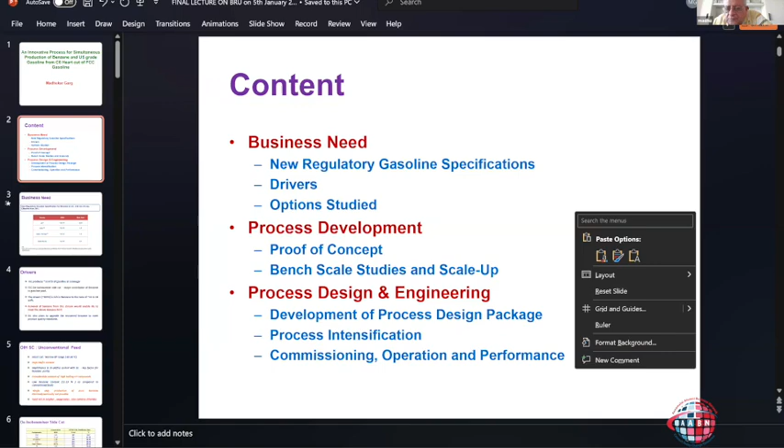Okay, so process design and engineering, and then finally commissioning and operation, and we also ended up doing what is called a GTR, guarantee test run.

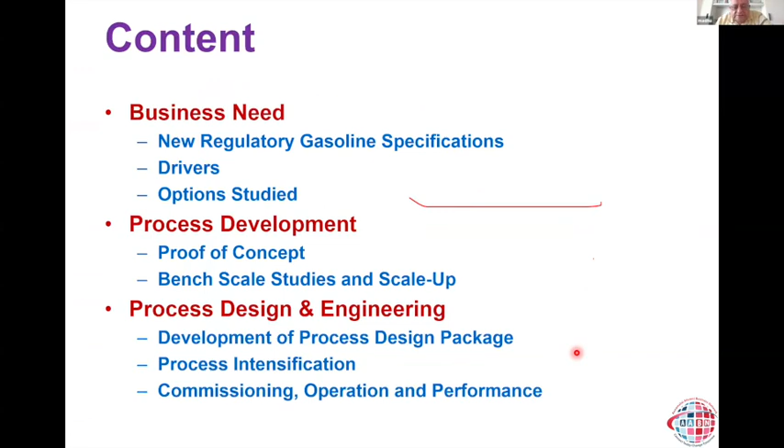Guarantee test run. Well, let's talk about the business need.

So roughly around 1% is the specification of benzene in FCC gasoline, because of its carcinogenicity. The US took the initiative under the MSAT 2 regulations to reduce it down to 0.62%.

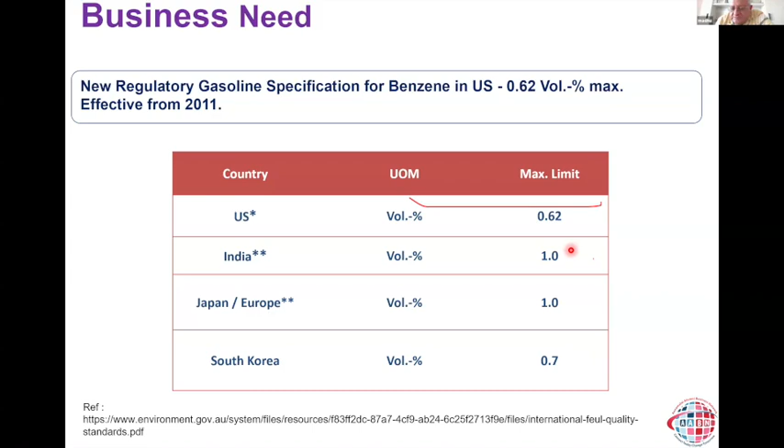At that time, Reliance had two of the world's largest FCC units, each about 200,000 barrels per day, so a very large quantity of FCC gasoline goes into the gasoline pool.

When Reliance looked at the various streams going into the gasoline pool, the gas plant of the FCC in Reliance is pretty exhaustive, and the de-isohexanizer column side cut was identified as the major contributor of benzene in the gasoline pool, roughly about 11 to 19%.

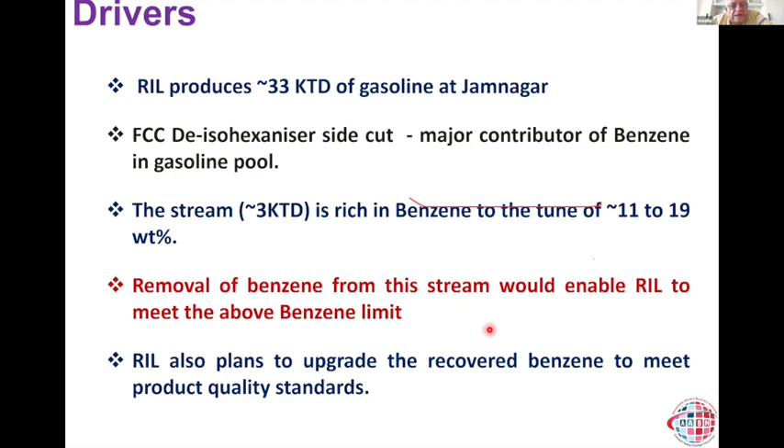So it was thought that if we could remove benzene from this stream, it would enable Reliance to meet not only the 1% domestic specification, but also 0.62% for export to the US. Reliance also thought that if we could recover this benzene and sell it, that would be a bonus—meeting the gasoline specification while also selling valuable benzene as a petrochemical feedstock.

Now, from the perspective of someone working in liquid extraction or extractive distillation, if you look at the de-isohexanizer side cut, first of all it's a hard cut—a very narrow boiling range, 60 to 90 degrees Celsius, with very high olefinic content, and I'll share the composition.

The naphthenes and diolefins co-boil along with benzene, making it very difficult to separate benzene by pure distillation, so they form an azeotrope. In fact, those knowledgeable about this area would know benzene forms azeotropes with almost every hydrocarbon—naphthenes and diolefins included, and for example, benzene and cyclohexane boil very close together.

A considerable amount of high boiling C7 components were present, compared to conventional feedstocks for making aromatics, like reformate or pyrolysis gasoline, which are roughly 60 to 80% aromatics or benzene. This is a very lean feed, around 11 to 19% benzene, so recovering pure aromatics from here is itself a challenge.

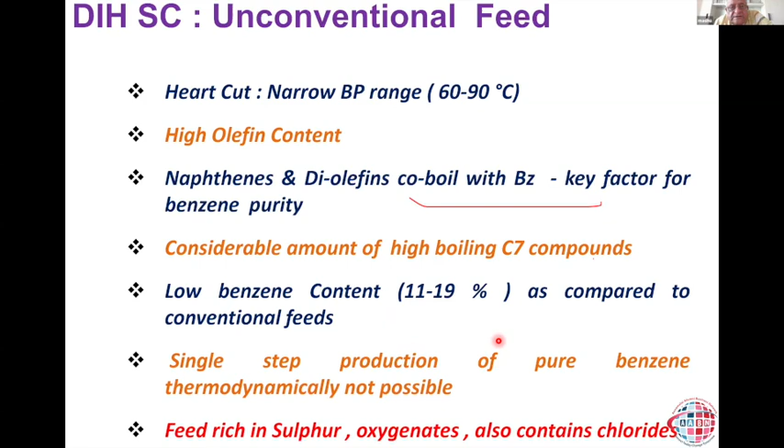This is typically the composition of this de-isohexanizer side cut. As you can see, the range of composition doesn't vary a lot—it's mostly C6 and a little C7, but very low in benzene, only about 15%. This is one of the samples we received at IIP; we received several batches of this material, but this is typical.

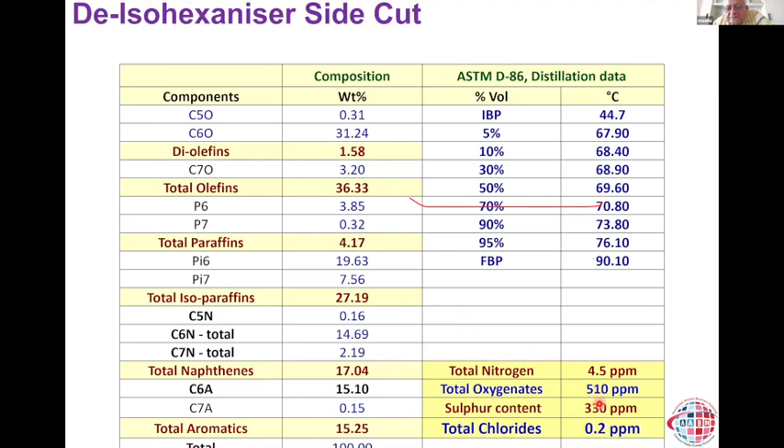The numbers won't vary too much from here. Largely what you see is that it has roughly about 36% olefins, which contribute to the octane in the gasoline. Paraffins is about 4%, isoparaffins 27% - this is also an octane contributor. Naphthenes around 17%, and there is C7 around 2%. More importantly, we have diolefins, roughly about 1.58%, and I'll come back to this in a moment. These are some of the impurities like oxygenates, sulfur, chlorides, as well as nitrogen.

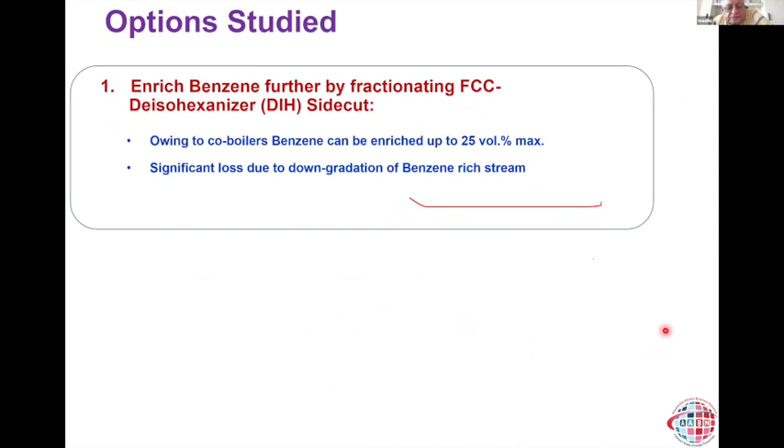So the options that were studied to begin with - this was done by Reliance. This was the time when I was at IIP, around 2011, 2012, about 12 years earlier from today. This work at IIP - Murthy ji sent me a mail sometime around end of 2010, early 2011, asking us whether we could look at this feed to achieve this objective. So this was some of the work earlier done by Reliance to see if we can enrich, or recover benzene just by simple distillation. But that wasn't possible, so that was given up.

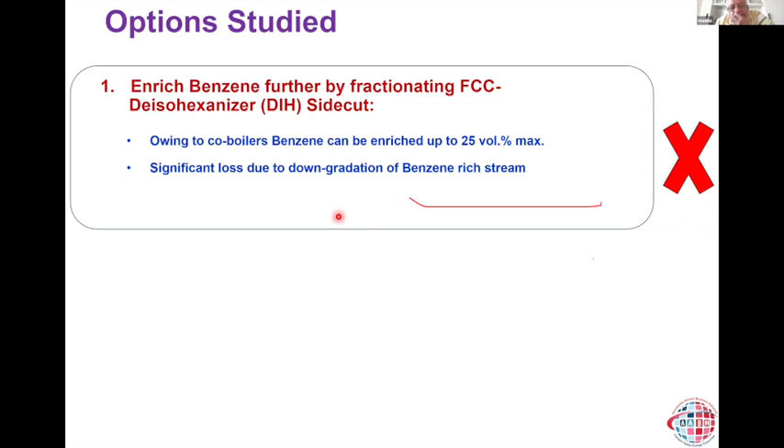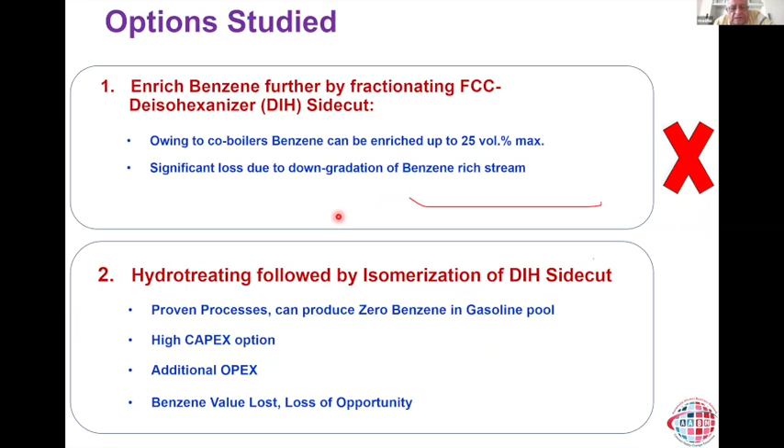And then, of course, the standard practice which the world follows is to hydrotreat this feedstock, followed by isomerization. But actually you lose the benzene. Not only that, but you have high capex and opex. So this was not something chosen by Reliance.

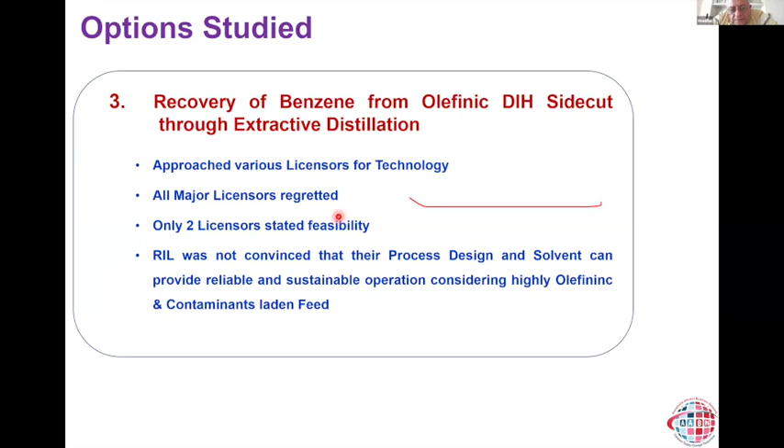So what was actually decided was that - this was when I was at IIP - Reliance approached various licensors for this technology. A lot of them regretted. Only 2 licensors stated feasibility, and one of them even competed during the project. But there was no proven technology - meaning no operating plant existed to recover benzene from this particular feedstock. So Reliance was convinced that we need to develop this technology, because no commercial solution existed to handle this feedstock.

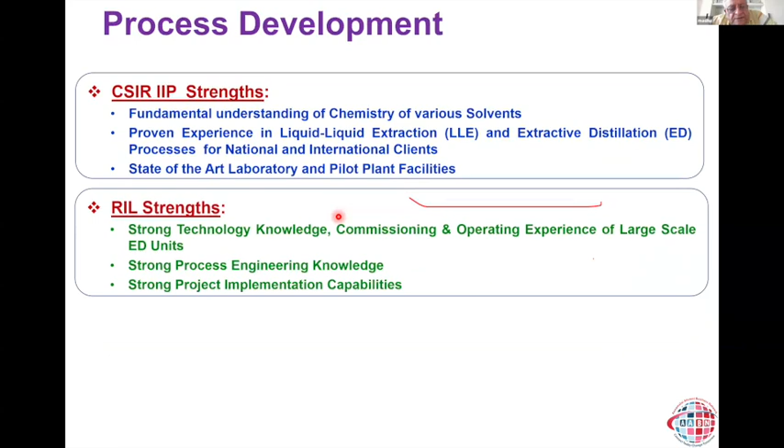So IIP and Reliance combined together as a joint team. I just talked to Abhishek Jha the other day - I think he might be also on the call. So there was a team formed between IIP and Reliance, where each one brought their own expertise to the table. Why I'm saying all this is because today, or even a decade ago when this work was done, there isn't everything you can hope to have in a single organization. So people have to synergize their strength, and this is a great example of that.

IIP brought a lot of strength in terms of fundamental understanding of chemistry and proven experience in liquid-liquid extraction and extractive distillation, with a large number of technologies developed and commercialized. Not only that, we also had state-of-the-art laboratory and pilot plant facilities. Reliance's strength was very strong technology knowledge, commissioning and operating experience, process engineering knowledge, and very fast project implementation skill. So ultimately this combined to form one team, resulting in a very successful development, process design, engineering, construction, and operation of the first-to-the-world unit.

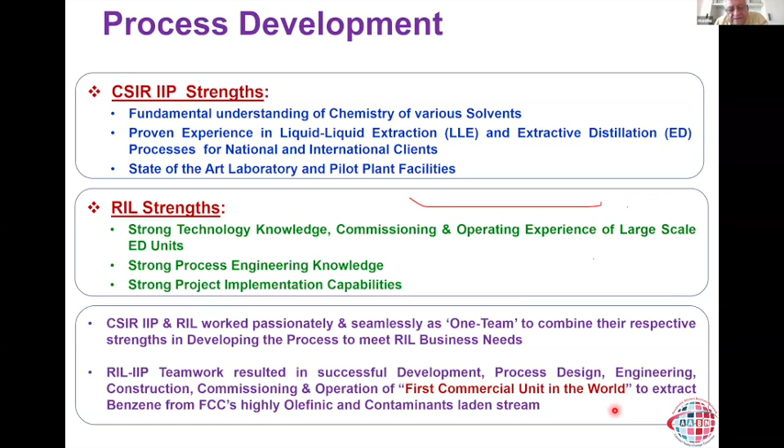And this still remains, by the way - I'm so glad to inform you that it still remains the only one of its kind in the world, operating in our own country in Jamnagar. So this is how the whole thing happened. This is the full story.

We already talked about the business needs. The next step was, of course, to do the real hard work: first, proof of concept - whether it will really work, the chemistry, the separation itself. Once successful with that, we moved to pilot plant studies and scale up, then process design and engineering, followed by construction, commissioning, and operation of the commercial unit. So that's the full story I'll walk you through.

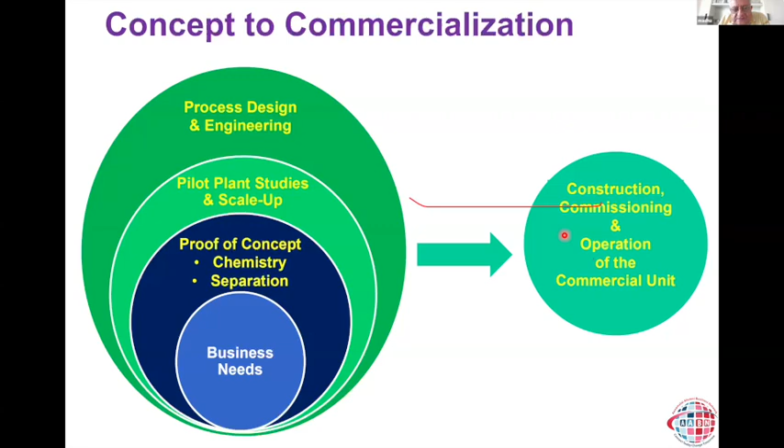So basically, the first step is the proof of concept, and for that we had to do laboratory experiments. There was an earlier talk regarding sulfolane. In fact, IIP has also developed several sulfolane-based technologies at BPCL Kochi Refinery, as well as food-grade hexane units. So we had large amount of knowledge, expertise, and confidence with sulfolane as a solvent, so naturally it became quite easy for us to use sulfolane for doing the studies. And since IIP had a lot of expertise in liquid extraction, we thought let's try solvent extraction, liquid-liquid extraction in particular.

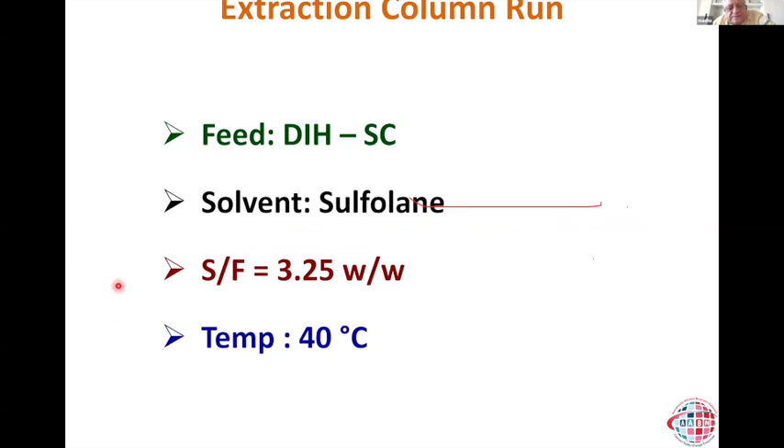So we used something like solvent to feed ratio of 3.25, temperature around 40, and this is what we got. The feed we talked about earlier had around 14% aromatics and 39% olefins.

We have a beautiful 32 millimeter diameter packed extraction column at IIP, where we carry out a lot of technology development work, and the same was used here. As you can see, the raffinate, which is the real product as far as this process is concerned, still has around 7% aromatics, that is about 7% benzene.

So that actually showed that liquid extraction was not going to work. And the extract has 64%, only 36% non-aromatics actually. So that does not meet the requirement of Reliance.

So we thought, since we have so much olefins in the feed, which are of lower boiling point, and since the aromatic content is low, let us try extractive distillation.

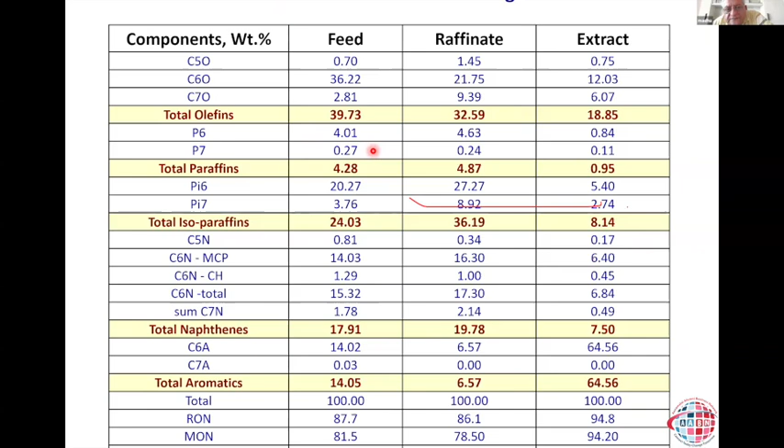So what we did was, we carried out experiments using a column called the Oldershaw column. I can show you a picture later, but the Oldershaw column is pretty much an industry standard to study difficult distillation systems, and not many people actually know about this column. It's a beautiful column where the data can be used directly for scale up.

I have no idea when this column was established at IIP, but everybody knew that we had an Oldershaw column, and that was the only one in the country. In fact, after joining Reliance, I established one more Oldershaw column at our Reliance Corporate Park R&D Center. So now we have two in the country.

This column is actually a glass column, jacketed with silver lining, so it's a cold wall column, and you can carry out distillation with various kinds of applications.

So what we did was we used sulfolane, 3 weight by weight solvent to feed ratio.

And what we found was that there were thick deposits, real black, like curdling of milk. We thought this column had not been in operation for many, many years, almost 3 decades, and nobody knew how to operate this column.

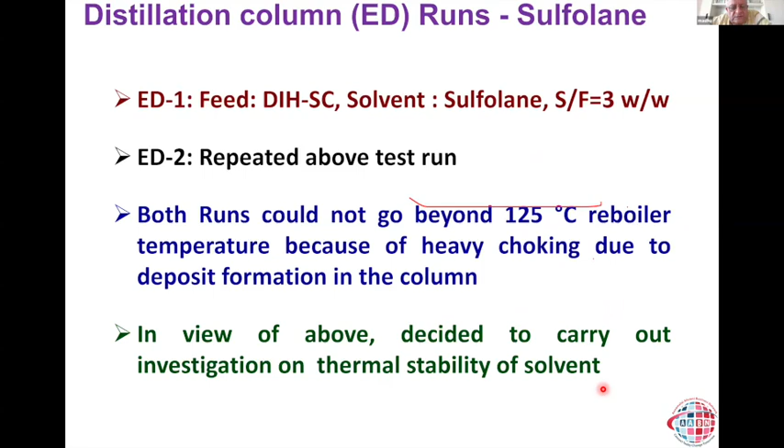In view of the above, we decided to carry out investigation on thermal stability. So what we did was, LMG1 is basically the acronym we gave to this feed, light motor gasoline. We mixed it with sulfolane and heated it in a 500 milliliter round bottom flask, representing something like a batch distillation, both in air and nitrogen atmosphere.

And what we found is that the color changed from light yellow to brownish and then became darker beyond 125, and at 140 we had dark deposits.

We tried the same thing with straight run naphtha, just to see what would happen there. We saw color change from light yellow to brown, but we didn't see any real thick deposits. You can see these deposits here.

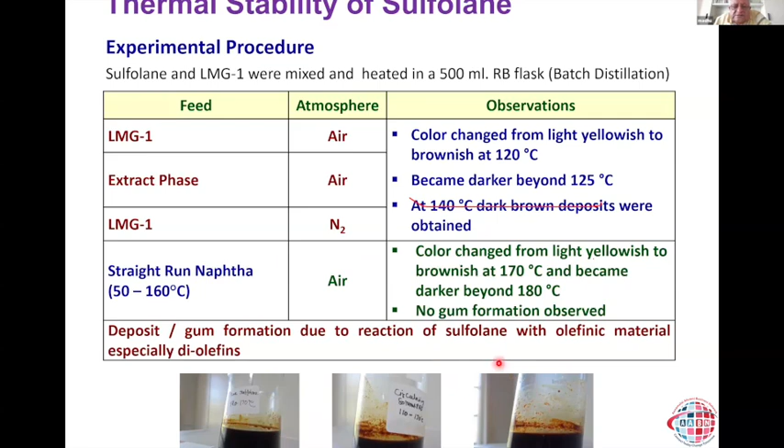These deposits are perhaps due to the reaction of sulfolane with the olefinic material present in this feed. This is something you can see, and this can't work in a commercial distillation column with this kind of deposits.

Then we used another solvent, N-methyl pyrrolidone, on which we also had a large amount of data and experience. In fact, at the food grade hexane unit at HPCL Mumbai refinery, we had actually changed from sulfolane to NMP.

We did this exactly the same way as we did with sulfolane, with various percentages of water also, and we didn't find any gum formation. The liquid was extremely crystal clear.

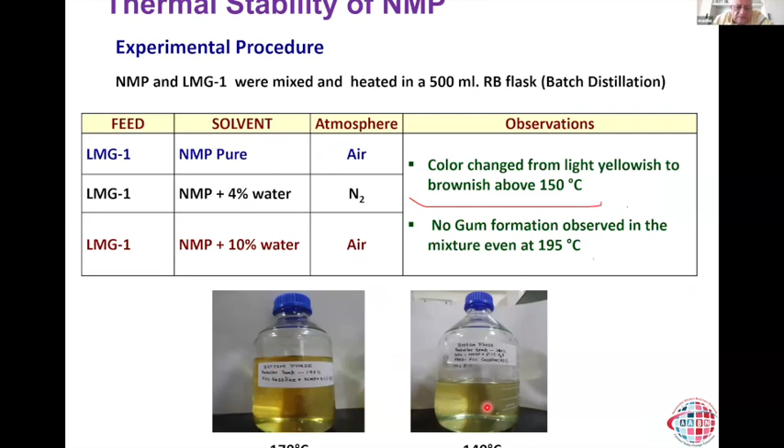So this was the summary.

We actually tried many other solvents, including NFM, that is N-formyl morpholine, as well as dimethyl and so on and so forth. In fact, we also added 3-methyl sulfolane in sulfolane, which is actually a solvent used by one of the competitors. In all the sulfolane-based solvents, we got black deposits, and the temperatures did not go over 120. While with NMP, NFM, and DMF, it works very well. But we decided to go ahead with NMP as a solvent.

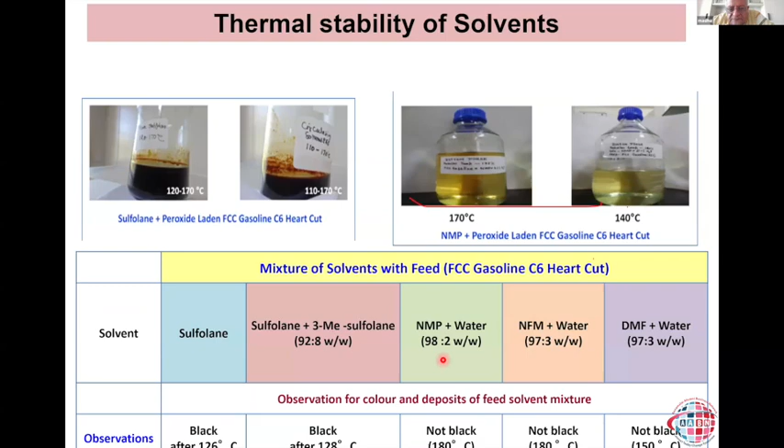So what we did was, we tried a few experiments with NMP, and I'll talk about it later.

But first of all, let me share the chemistry, and this is very interesting. In fact, at IIP, we had some very strong organic chemists, synthetic organic chemists, and we got them to actually think about what exactly happened, particularly with sulfolane, and why it doesn't happen with NMP.

So this is where actually what they came up with was that the conjugated diolefins, that means these cyclic diolefins like cyclohexadiene and cyclopentadiene, actually react with oxygenates, particularly at the allylic hydrogen position, to form organic peroxides. And these organic peroxides interact with diolefins, especially conjugated diolefins, initiating polymerization reactions. This is a chain reaction which happens, and it causes degradation of sulfolane, particularly at high temperatures.

The reason is that the S double bond O of sulfolane is highly polar due to the lower bond strength, as compared to of the C double bond O, that is the carbonyl group in NMP. So basically nitrogen-based solvents such as NMP, NFM, and DMF all have this carbonyl group and hence are much more stable compared to sulfolane. And since the polarity as well as acidic character is much lower, they do not actually initiate the polymerization as sulfolane does. So this was quite well proven, kind of proof of concept, that sulfolane is not going to work.

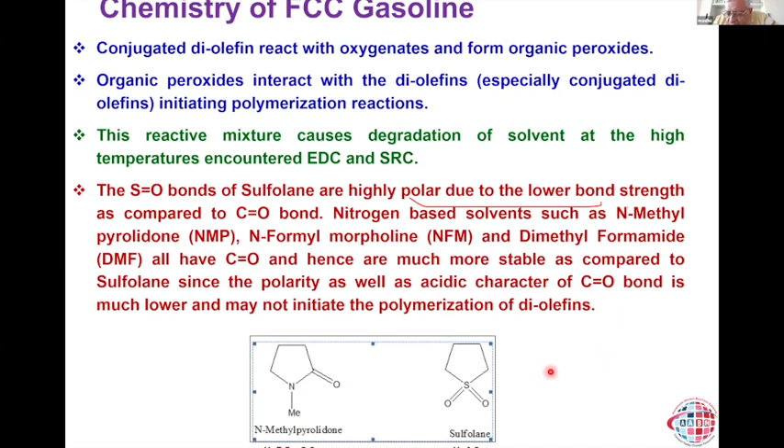So we did some probe runs with N-methylpyrrolidone. Initially, of course, we carried out a few runs on the Oldershaw column just to find out whether we would meet Reliance expectations at all. And the results obtained were quite encouraging. In fact, we were not only able to meet the benzene spec on the raffinate, but also got a reasonably pure extract. Based on this success, more than 100 runs were carried out, which is not something trivial with NMP as a solvent, by changing various operating conditions like solvent to feed ratio, solvent water content, reboiler temperature, reflux ratio, etc.

This Oldershaw column had 50 trays already in it, and so even the feed plate location, etc., were actually changed.

With every run, we carried out a complete detailed hydrocarbon analysis, the one that you saw earlier, along with the sulfur content. One very important thing I would like to mention here, and NSM, who is on the call, would recall that every time we did a run, we actually sent samples in vials to Reliance as well, so they could also do analysis at their end. This helped us a lot, not only to build a correlation between our analysis and Reliance's analysis, but also confidence in Reliance to see what exactly was happening at Dehradun. And more importantly, if our machine, that is our GCMS, is down, at least we can get the data from Reliance.

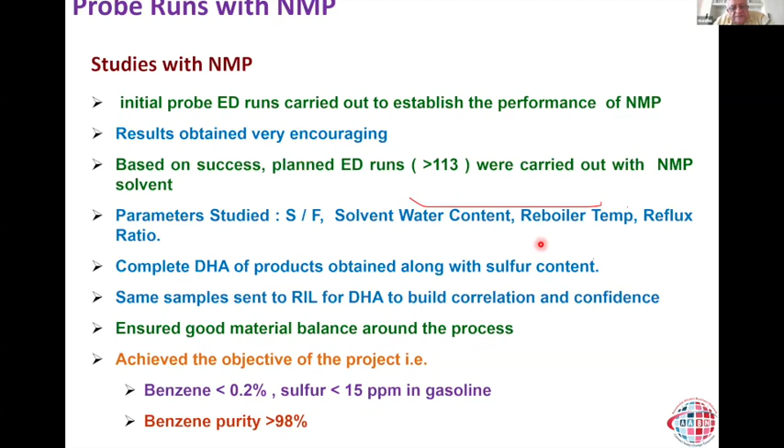Actually, we carried out all these runs. For each one, we also looked at the material balance, and our target was less than 5% in terms of feed and the products. To achieve the objective of the project, for example, benzene less than 0.2%, sulfur less than 15 ppm, and benzene purity greater than 98%, all these runs and the parameters we varied were ultimately to meet these three objectives.

And then whatever data we got, we also reconciled the data to be able to meet not only the overall mass balance, but also component mass balances. And then the development of the simulation model. So all this data was then used to actually develop a simulation model on the Aspen Plus platform.

As you know, the non-ideal liquid phase activity coefficient parameters in any of these commercial simulators do not actually represent the real world system accurately, so it only provides a flow sheet simulation. But we had to fine-tune the component interaction parameters using the experimental data.

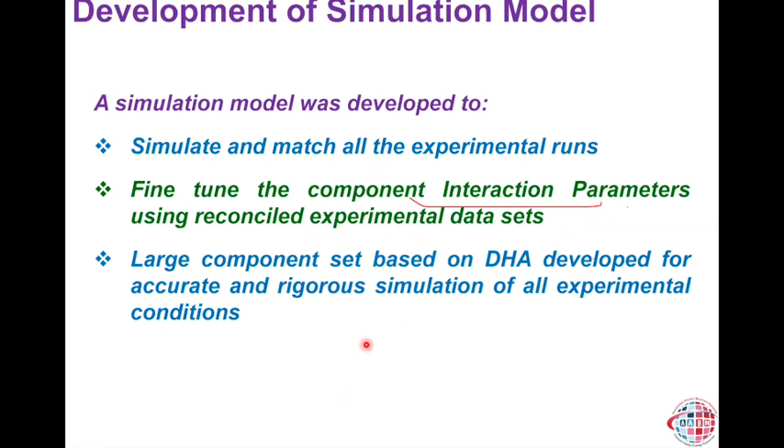A very large component data set out of those 113 runs was used to actually estimate these parameters. What are these parameters? For non-ideal systems like the one we are looking at, because we are adding solvent which is polar into a feed which is non-polar, that actually creates non-ideality in the system.

What I mean by non-ideality is that the liquid phase activity coefficient is no longer 1. So the relative volatility between two components, A and B, is now not only fugacity coefficient into vapor pressure ratios, but also it's multiplied by the activity coefficient. And this activity coefficient, we have several thermodynamic models. These are called solution theory.

But the one proposed by Renon and Prausnitz in 1968, called NRTL, that is non-random two-liquid mixing model, is the one that is actually used very popularly in all these flow sheet simulators. But that needs estimation of several parameters that you see, like tau ji, tau ij, as well as alpha ij.

What happens is, this particular simple feed that you saw, boiling in the range of 60 to 90, already has 39 components, going right across various paraffins, isoparaffins, olefins, diolefins, naphthenes, and aromatics. So with 39 components, you get a 39 by 39 matrix of tau ij, similarly a 39 by 39 matrix of tau ji. Of course, alpha ij we normally keep at 0.2. So these parameters are required to be able to do a reasonable job of simulating these systems.

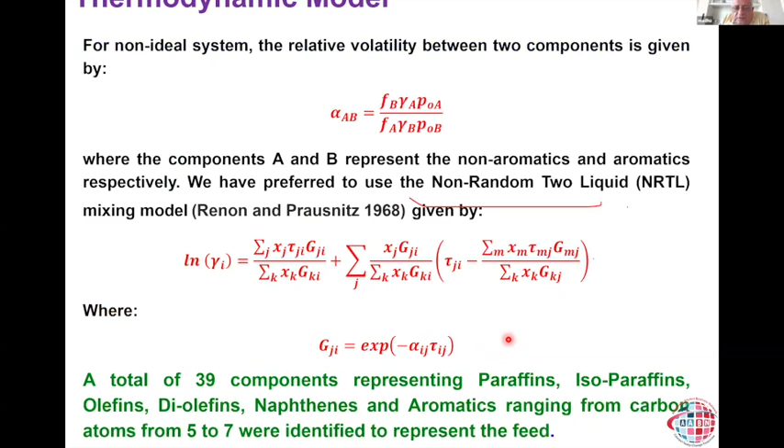And unless and until you are able to simulate on Aspen, you cannot actually scale up and do process design. So this was the most critical step in terms of enabling use of a commercial simulator like Aspen: estimation of these NRTL parameters. So of course, in Reliance, in IIP, we had a large amount of data already available for olefinic feedstock.

So after doing the consistency check, this data was then used to estimate these parameters, some of which we didn't have time to estimate. We actually resorted to literature and the Dortmund data bank, and ultimately fine-tuned these parameters with respect to the actual 113 runs that we carried out on the Oldershaw columns.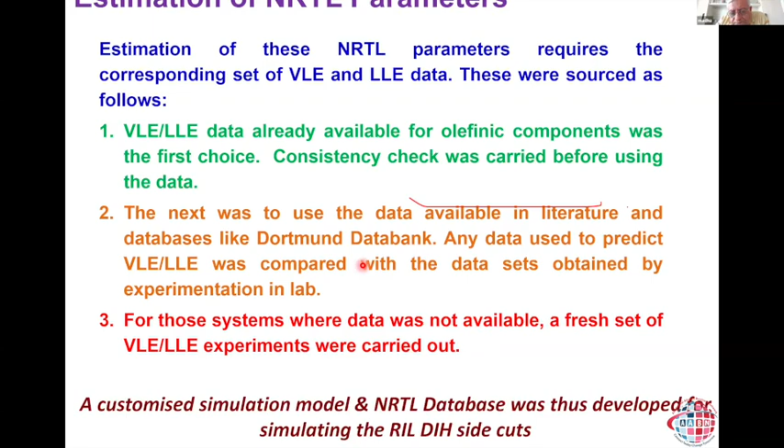And these are some of the data that I'd like to show you. This is by no stretch of imagination the actual operating conditions in the commercial unit at Jamnagar, but let's say it just gives you an idea as to the data that we generated for each of those 106 plus runs. So let's say the reboiler temperature is 145, NMP containing 5.1% water.

You can see that we were able to match the reboiler temperature reasonably well. This is the lab data of the raffinate, this is the simulated values, for the various components that you saw earlier: C5, C6 olefins, the olefins, the diolefins, the paraffins, the isoparaffins, naphthenes, and aromatics. And this is the extract, that is the bottom of the column. And we are able to see that we were able to establish the proof of concept reasonably well.

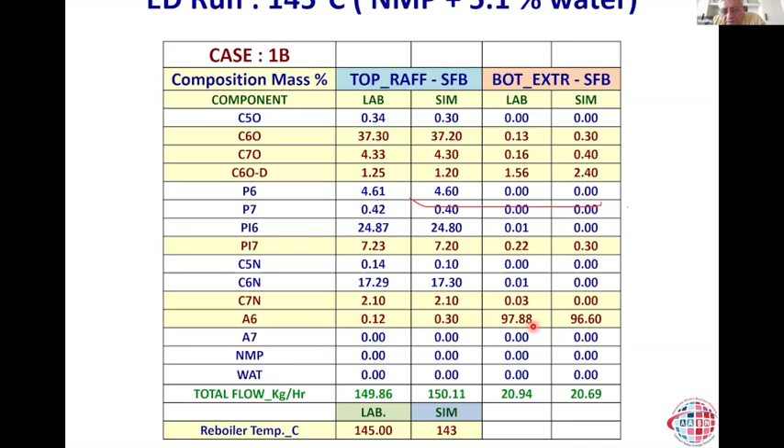Top raffinate is 0.12 aromatics, as well as almost 98% pure extract. In fact, when you go up on the reboiler temperature to 180 degrees with less water in NMP, you can see that we could even achieve 0.05%, which is 500 ppm benzene in the raffinate, which is very good, and around 97% extract purity.

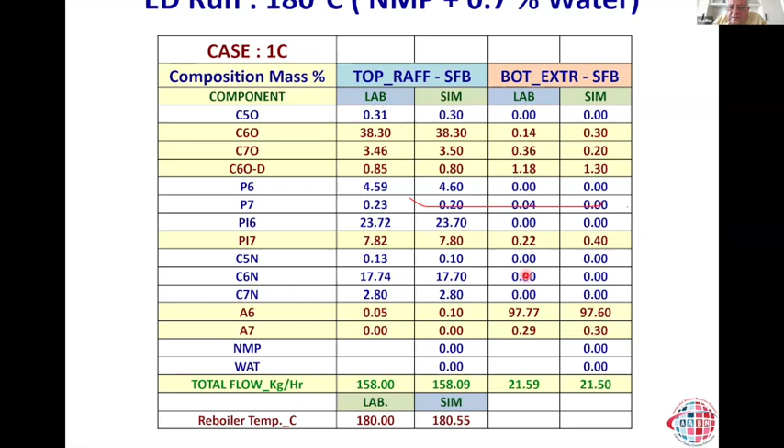One of the major impurities which I would like to mention, which you cannot get rid of in the extract, in other words you cannot make 99.4% type benzene, is because of the presence of C7 paraffins and isoparaffins, which are actually because of the deisohexanizer hard cut by itself, and the C6-diolefin. So these are the two major impurities which somehow remain in the extract.

So some of our observations: sulfolane is not possible for this kind of feedstock - this was a big contribution made by IIP, showing that an industry standard kind of solvent cannot be used for this kind of application. NMP, of course, proved very well. Not only that, we were able to actually remove almost the entire benzene from the feed and produce 98% plus pure aromatics.

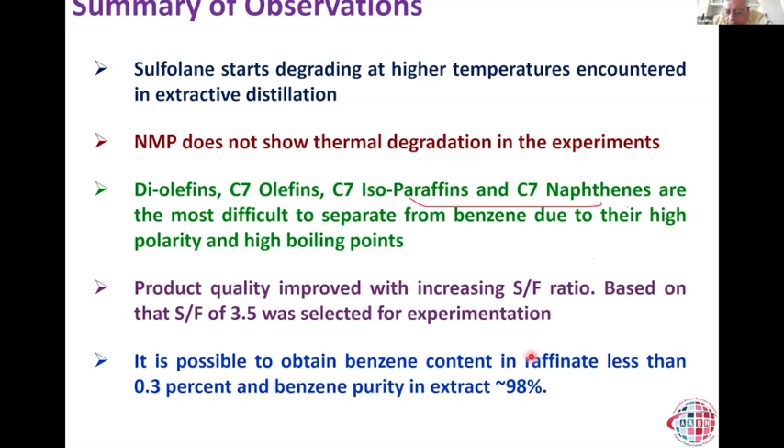We optimized the various operating conditions, and based on that we were now ready to do the process design. And here, of course, there were many requirements from the site: we need to maximize air cooling duty wherever possible, use of MP steam, minimization of solvent loss, avoidance of pressure below atmospheric pressure - that means not using vacuum in the solvent recovery column because of the fear of oxygen ingress - and to be able to maximize process-to-process heat exchange.

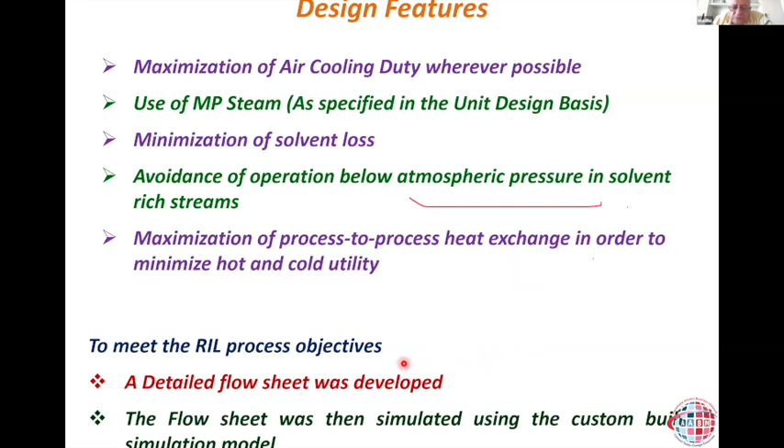So a detailed flow sheet was developed at IIP. Why I'm saying this is that here is a research lab in the CSIR umbrella having the capability to even develop a flow sheet and a process information package. And this flow sheet was then simulated using the custom-built simulation model that we established on Aspen. This is the process flow sheet that we came up with.

Almost 85% of the feed is this raffinate.

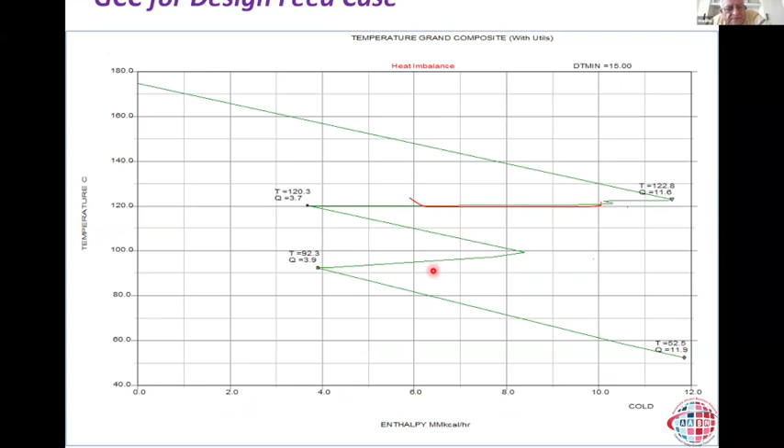And we looked at the grand composite curve as well, and we found opportunities for heat integration. Basically, there's one hot stream, and there are many, many cold streams. That's what it shows. These are the various reboiler duties that we need to provide for.

So we actually ran the hot circulating solvent through several reboilers, two side reboilers in the extractive distillation column. So you can see this whole thing rather than me talking about it, let me walk you through it.

So this hot solvent which comes out from the SRC bottom, we take it to run the stripper reboiler as well as to heat up the feed to the stripper. Same thing with the other stripper, that is the SRC stripper.

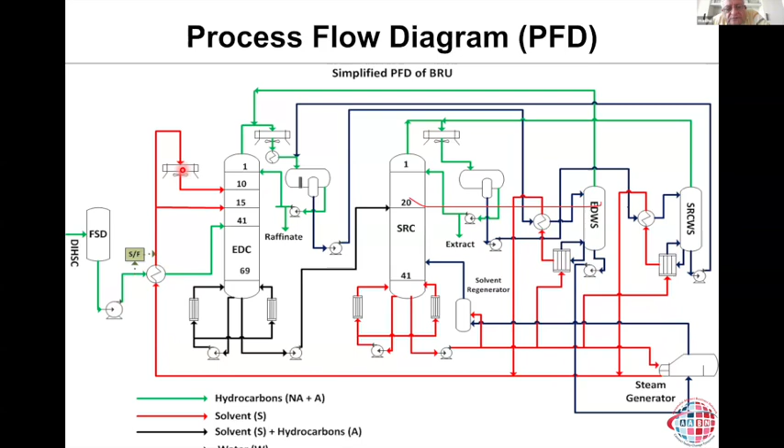We take the same solvent to generate the steam, and also to be able to vaporize the feed. So we in fact not only preheated the feed, but also did almost 80% vaporization of the feed to be able to minimize the fin-fan cooler duty to cool the solvent down to the required temperature before it enters the extractive distillation column.

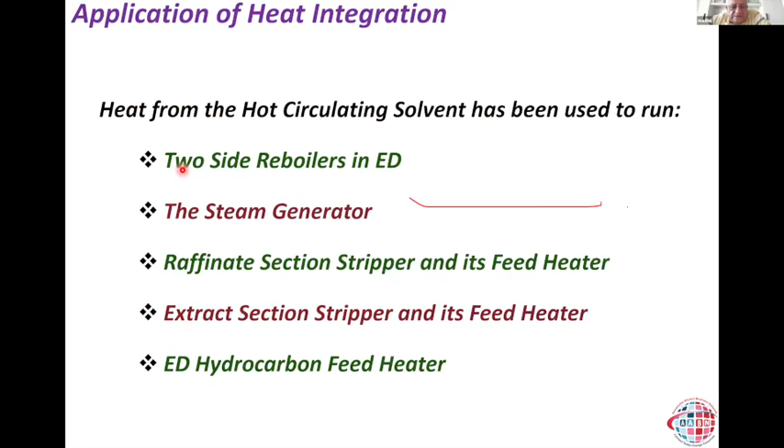So this is what is actually listed here. This technology that we developed, the entire development work was completed roughly around 2012. We put out what I personally innovated. This is what we call a TIP, Technology Information Package, which is basically a complete flow sheet, heat and mass balance, sizing of major equipment, etc. We provided that to Reliance to be able to do the costing, etc.

So basically this summarizes the novelty and innovativeness of this technology. First of its kind processing operation. As I said, this is the first in the world application where the virgin feed coming from the FCC was directly processed without any pre-treatment.

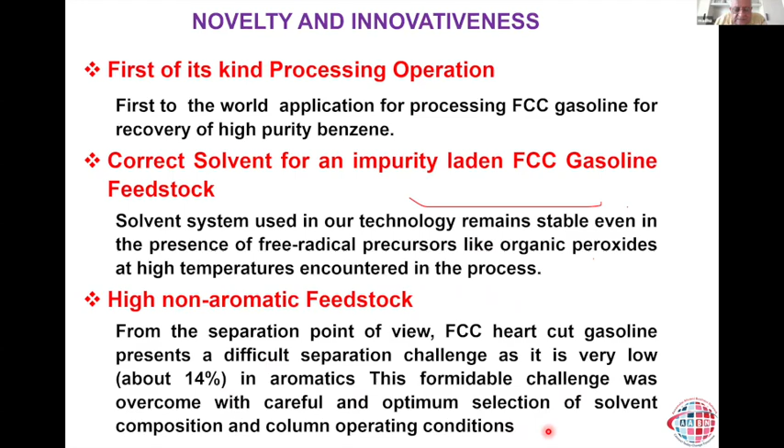An optimum solvent for handling this feed containing various impurities such as oxygenates, chlorides, sulfur, and so forth. Particularly to handle the organic peroxide, we estimated this by the parameter called peroxide number. To handle a very lean feed containing only about 11 to 14% aromatics, to make almost 98% pure aromatics. This is a formidable challenge which was overcome with careful and optimum selection of solvent and operating conditions.

That was the technology part. Then came the flow sheet. Our innovation was to have two separate strippers, to handle the water very closely, to not only minimize but also eliminate completely the loss of NMP.

A rigorous simulation model was developed. This is actually the key to this whole technology, not only for simulating the whole flow sheet, but also to gain confidence of the client that something like this would work. Remember, there is no commercial unit in operation. The whole data was generated in a 1-inch diameter Oldershaw column, and from that data we developed a flow sheet. Then, for a company like Reliance to be able to invest in a new technology where there was no commercial reference at all.

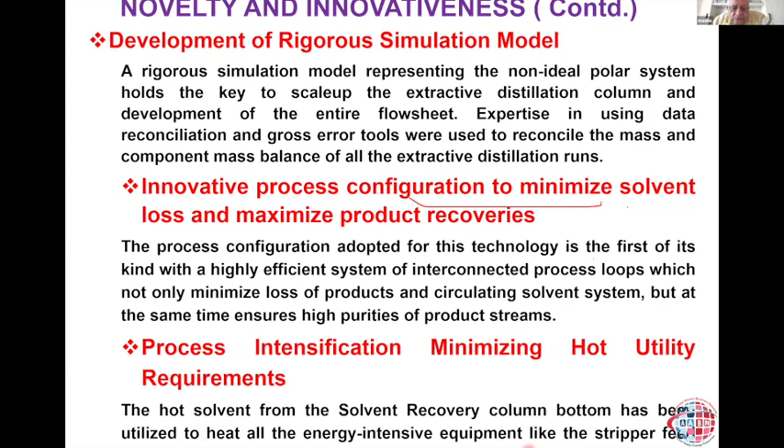Personally, I have a lot of experience in data reconciliation and gross error detection. So we used these tools to close mass balance and component mass balances, which was then used to cross-check with respect to simulation. Very innovative process configuration, and minimizing energy in terms of pinch analysis and process integration.

This actually looks like a simple picture to you. This is the US patent that we got way back in 2014. In fact, the inventors, the assignees, are both CSIR as well as Reliance. But it's a separate story about this patent. Not only in the US, but we got patents across all major economies in the world. A few more patents have been allocated in Malaysia, Singapore, and so on. In the European Union we have validated in 6 countries, and India. So it's a heavily patented technology with a date of priority of 9th August 2012.

There's a lot of struggle which cannot be discussed in this kind of forum. But I think for people who are actually developing technology and also simultaneously competing with international companies to push their technology into a company like Reliance, it's actually a pretty big learning curve. This particular effort, this one single page, is a big learning curve for anybody to be able to achieve that great target.

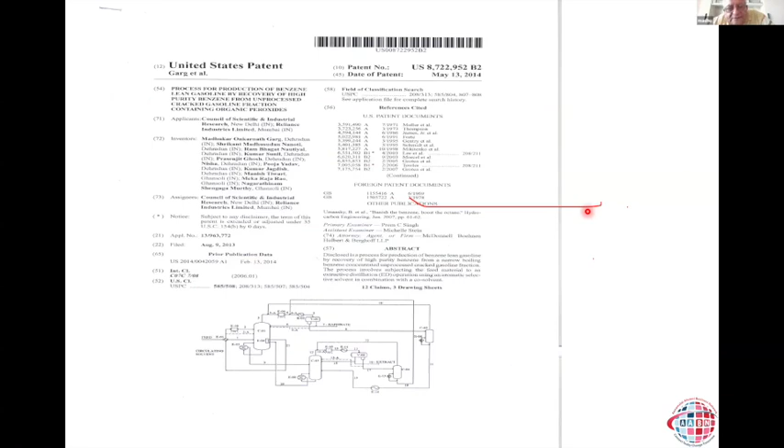And so this was the commissioning of the unit. The unit was commissioned — I still remember that day. It was a Buddha Purnima day, 23rd May 2016, so it was a full moon day. And we cut in the feed at 10 past 9.

In fact, Abhishek Jha, I think he might be on the call. He was there, and then no incident, flawless commissioning. We had on-spec product in RTF within 48 hours. You can see me here turning the wheel, and Mr. Kapil, who was one of the directors, Bala, who was head of operations. We got 100% throughput within a week, and as we speak, the unit is operating at 150% of the design capacity.

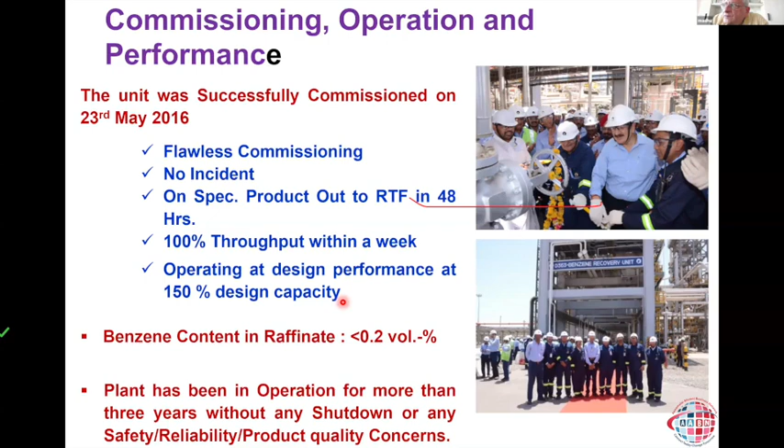In fact, this one single unit, this is the picture of the unit. We had this, the picture of the team. It's called D363, the benzene recovery unit. And the plant has been in operation continuously since May 2016. It has only been shut down last year, not last year, in 2023, September, along with the FCC major shutdown. So the DTA FCC unit, DTA means the old refinery, shutdown happened in September 23, and that's when BRU, the benzene recovery unit, was also shut down for maintenance. So it ran from 2016 to 2023, almost 7 years without a major shutdown.

This is the team actually. You can see Abhishek Jha, I think, here, myself. And this is that one team that I talked about, IIP. We have Shrikant Nanoti, Sunil, Prasenjit, these are from IIP, and Bala, and so on and so forth. Nautiyal, who is our chemistry guy. Sachin Punekar, who is now at Jamnagar, he's chief of operations. This is the picture of the unit.

In fact, every time I see this unit, when I go to Jamnagar, you can't even believe how proud I feel when I see it. From a 1-inch diameter Oldershaw column, this is a 4.5-meter diameter extractive distillation column, 55-meter tall. This is the solvent recovery column. You can barely see the two strippers here. I think this is the one at the back. This is the reboiler, of course.

This is a huge unit, actually, and very fortunate. It's actually on a corner plot, between the main road and the road going to the other part of the refinery. And these are the fin fan coolers, as you can see. We provided 3 feed entry points just to make sure that if the decided location that we thought was ideal doesn't work, then we can shift the feed location.

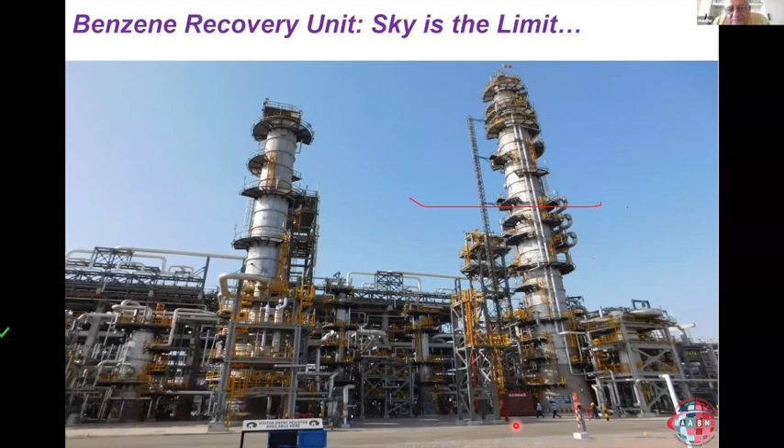A very large number of awards was given to this technology. To begin with, the CSIR Technology Award in 2014, and the first ever Ministry of Petroleum and Natural Gas Innovation Award, given by Center for High Technology. The ICC Award 2016 - in fact, Mukesh Bhai himself was there in that award ceremony in Taj Hotel in Mumbai. But the biggest thing, of course, was the TDB National Technology Day Award. This is India's biggest award, carrying a cash prize of 50 lakhs. And this was given in 2019.

Of course, physically, we could not get this because this award is given every year on 11th May, that is on Technology Day. And on 10th May, Delhi went on for votes for the general elections. So from a safety perspective, this particular award ceremony was not held. And then COVID came, so finally this award was dispatched, but the ceremony could not take place. And of course, we were also finalists for the Kirkpatrick Chemical Engineering Award in 2019.

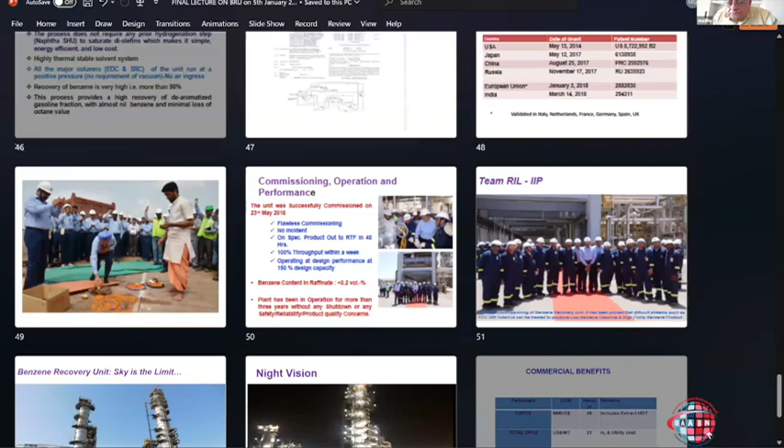If you look at it, I talked about the solvent loss along with the raffinate. That we are controlling by actually washing this overall overhead stream with water. So there's a complete mixing of this overhead raffinate stream with this water. Remember that 85% of the feed is this raffinate. And if even this contains 10 ppm NMP, which should be okay from a gasoline blending perspective, still it's a large amount of solvent being lost. So what we did was we actually brought this water from the SRC overhead, from the SRC stripper, all the way to the column top and mixed it so that we don't lose any solvent along with the raffinate.

Now, the other source is this extract. There's a large amount of steam which is being put here in the SRC, generated from this water itself. So that goes up, and when it condenses along with the aromatics, it actually dissolves the solvent out from the aromatics into water. And then this extract becomes less in NMP. Now, all this water which now contains NMP, we need to handle it in a very efficient manner.

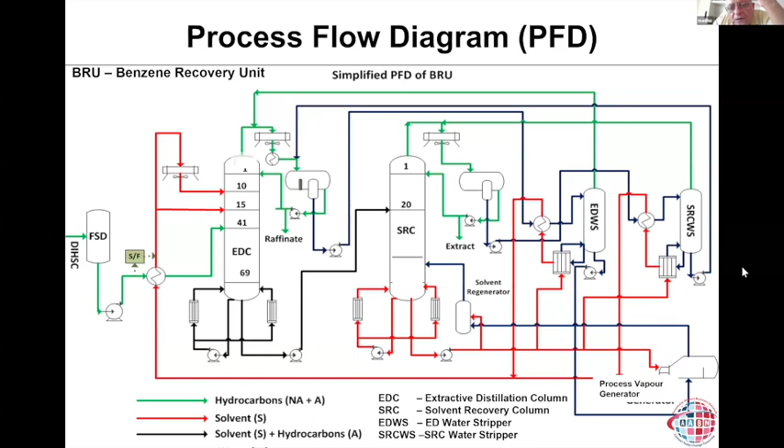As far as the operation part is concerned, this is completely automated. In fact, if you look at it, this is the PFD, the process flow diagram with all the control systems etc. And now this unit has been put on advanced control. So there's no problem in terms of operation. Remember, this unit has run for 7 years without a shutdown.

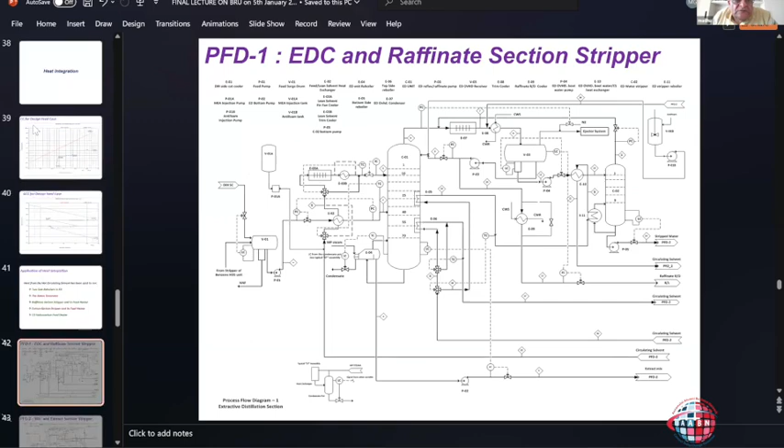As far as the strippers are concerned, this is actually pretty mild operation. The feed coming into the stripper is mostly water with a very little amount of hydrocarbons. So this system is full of water. So there's nothing in terms of any blockages or heat exchangers being choked and so on.

And also this is running free because we are using the hot circulating solvent to run these two. If we weren't running these two, our fin fan cooler duty would have gone up. So actually, these are running for free.

So managing water in this kind of unit, particularly with NMP, because we had to optimize the water content in NMP -- this part is actually discussed more in the patent that I showed. But there's a certain percentage that we need to maintain, which gives optimum performance in terms of benzene in the raffinate and the percentage aromatics in the extract.

I hope that answered your question. Yeah, fine. Thank you, Doctor.

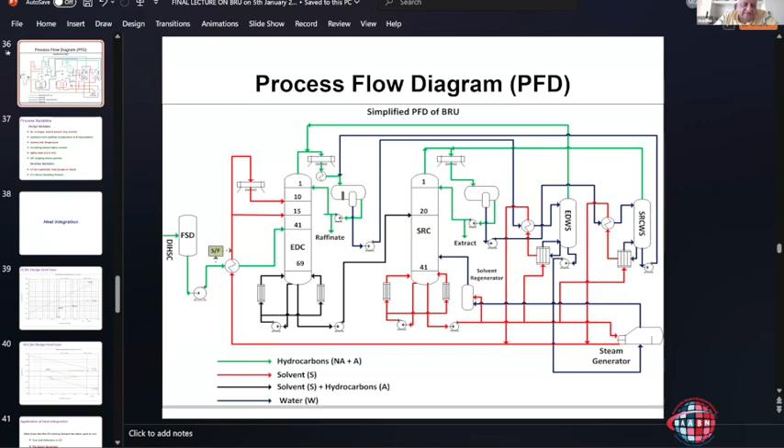Well, he has been a champion of this from the Reliance side. I must say that he had the unwavering confidence that we can do this. In any technology development work involving a research lab and the industry, and in our country we talk a lot about industry academia interaction and collaboration and so on, I've been hearing it for more than 2 decades now. But this is how you can make it happen. You need a champion from the industry who believes in something which can be done, and pushes that cause within the company. NSM actually did that. I don't have words to thank him for that effort he put in. Without him, I don't think it would have been possible to come to this level.